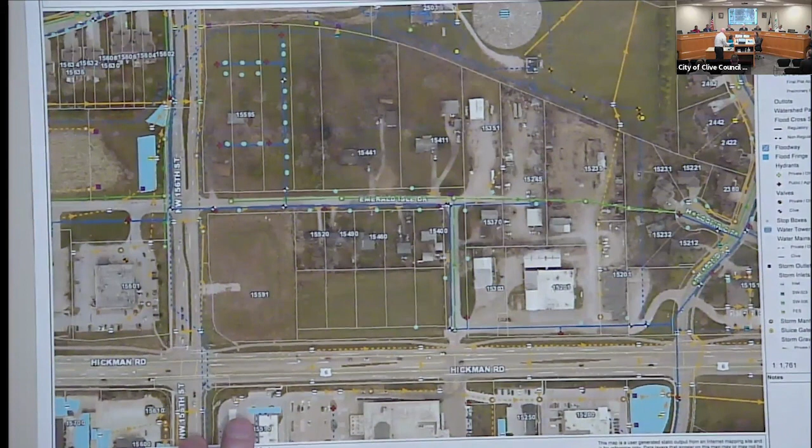Good evening. What you have before you tonight is a proposed preliminary plat for an approximately 4-acre parcel of property, generally at the intersection of 156 and Hickman. As you'll recall from a few months ago, there was a discussion around the property with respect to the rezoning of the property for commercial retail and service uses.

That decision was made by the council, so what we're dealing with tonight is the question of the subdivision of the property. This is the first step in subdividing property to allow for ultimately future development to occur on the property. The preliminary plat specifically gives the city the opportunity to evaluate the capacity of the infrastructure to support the subdivision of the property, so questions of what is the necessary roadway infrastructure, water, sanitary sewer, storm sewer, et cetera - either is it in place, or is it a function of the developer to install those improvements to provide the requisite capacity for the future development.

Following approval of a preliminary plat, applicants would then move on to the next step, which would be submittal of construction drawings, which would be the specific details associated with the public improvements. In this particular case, the applicant has started the process of designing the roadway improvements that are necessary for the property. That also has a component of stormwater as part of those right-of-way improvements.

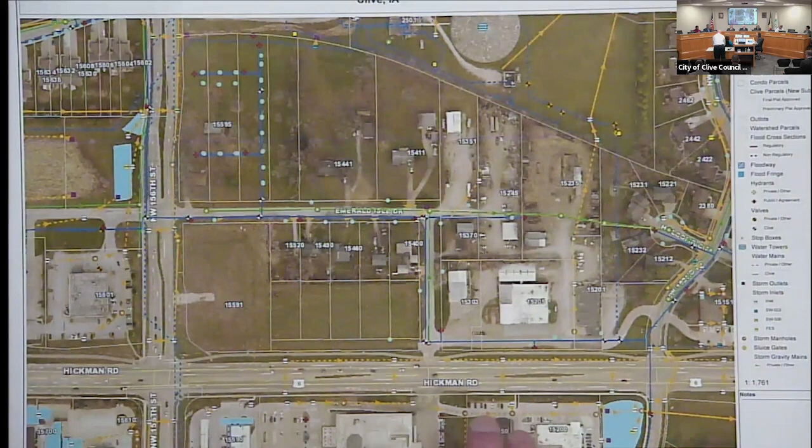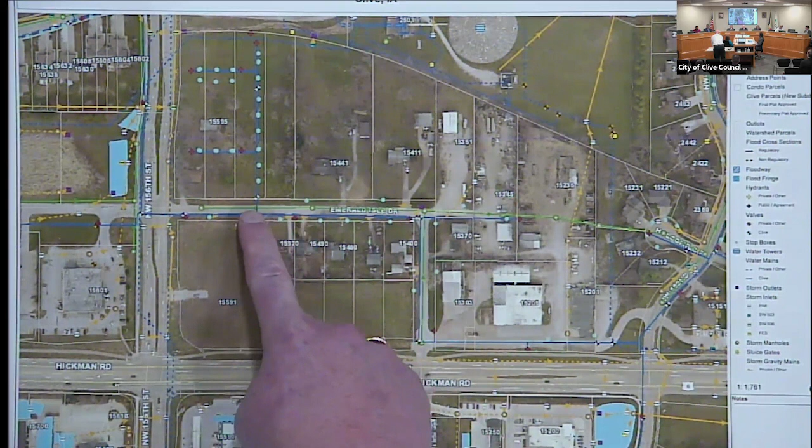So again, this parcel has been developed with a commercial bank. As part of their site plan, they made improvements to Emerald Isle adjacent to their property. As this property develops, the zoning change agreement established the responsibility for the property owner to make improvements to Emerald Isle Drive from Hickman to the point where the bank stopped.

Okay. So those plans are in the process of being reviewed. And that would be during the development, not the platting, right?

So they have the preliminary plat, which was identifying the conceptual subdivision of the property. We are in review of the construction drawings that will be approved by the council probably within the next few weeks. They will get underway with the demolition of the existing site features on the property, the existing houses. Once the construction drawings are approved, they'll be underway with the construction of the public improvements. And then along this path as well, they will submit for their particular interest, which would be lot 2, the one in the middle, for a site plan approval for the construction of a car wash. That will then subsequently get underway in terms of its construction as well, all coming to a point of conclusion in theory later this fall.

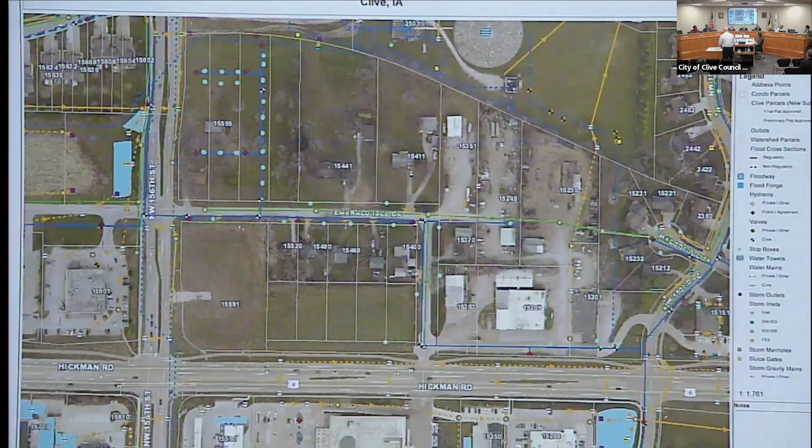Any other questions from the council? Otherwise, we'll invite others in the chamber. Would someone in the chamber like to address us on this matter?

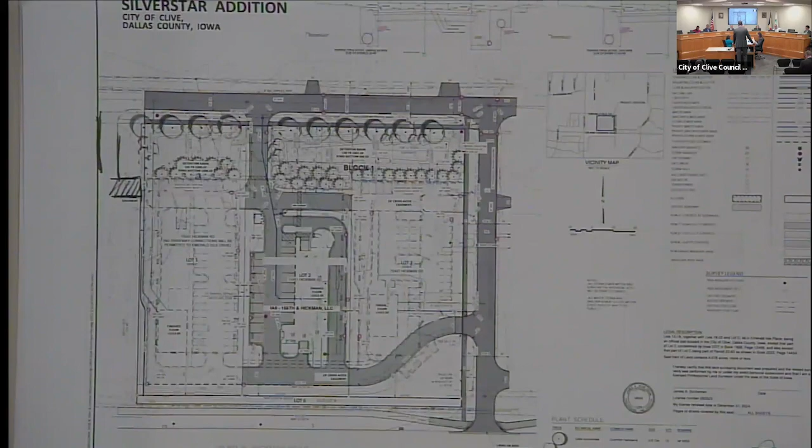As Doug laid out, we're here to seek approval on the preliminary plat. I have a couple representatives from Midwest Fidelity Partners here with me, along with one of our engineers. We've reviewed the staff report and recommendation. We would ask council to vote to approve our preliminary plat this evening, but we're happy to answer any questions you have for any of us. Any questions at this point?

Eric? Can you tell me about your plans for demolition of the current existing structures on there? I had a chance to drive by and it looks pretty rough. Can you give me a timeline and your planning on that sequence?

Sure. I'm going to defer to TJ Nelson on the timeline, but I believe the City of Clive Fire Department and Police Department have been using a few of those structures for training purposes, but I'll defer to TJ as to when that actual demolition will occur.

TJ Nelson with MFP. So we don't have a hard scheduled date for those yet, likely in May ahead of what we would hope to be a June construction start. Till then, we've been working with the fire department and PD so they can use those for training, and that's why they look so rough—they've been chainsawing into the roofs and whatnot.

Thanks. Is there anyone else in the chamber who would like to address us on this matter?

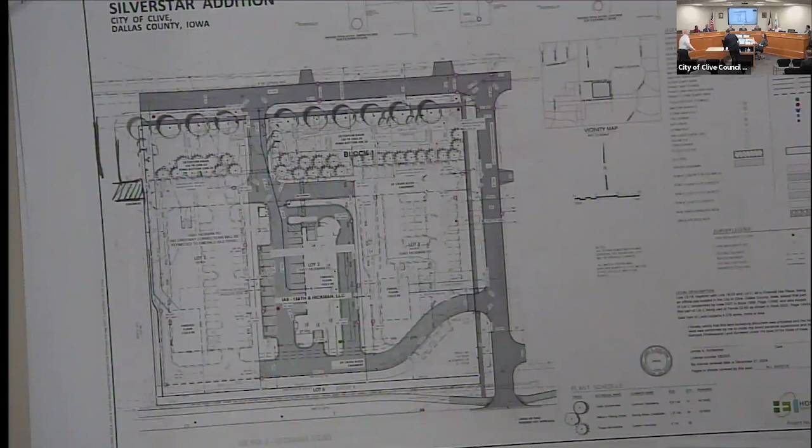Let me put a map up. I believe this is an accurate depiction—it's not going to be exact, but you'll get the gist. As you can see, this is that cross-access point there.

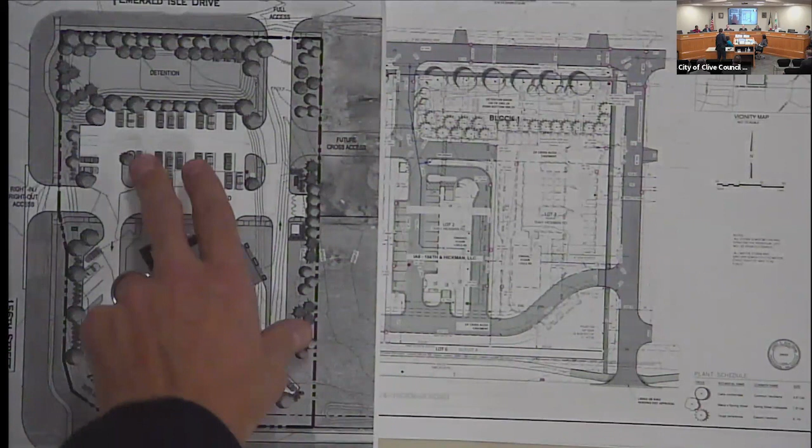Here's the platted parcel here, and here's the bank operation. Ultimately there's a right-in, right-out access off of 156. What the bank is after—we're worried. We've got employees and customers that are going to be entering or utilizing the bank. Here's the drive-through, which will come through here and then spit up there. Our primary concern is safety and operational issues there.

We're going to have presumably three high-traffic operations. The original proposal, I believe, was a two-lot setup—car wash and then maybe a small-scale office space. That's obviously shifted to this more narrow three-lot setup, which I think probably dictates car wash and fast food operations, which are high traffic operations.

I think ultimately the concerns are fairly obvious. If we have high traffic operations to the east, if there's any sort of internal traffic congestion or confusion, that gets funneled directly over to this bank's operation, which an office use and these high traffic fast food and car wash uses aren't wholly congruent there.

So inevitably, there's going to be, in our view, operational issues just with the internal traffic flow and safety issues, as the bulk of the traffic coming up on 156 more than likely will take that right-in to the bank's lot as compared to getting to Emerald Isle in an attempt to get to the other operators slash establishments to the east there. So that's our primary concern.

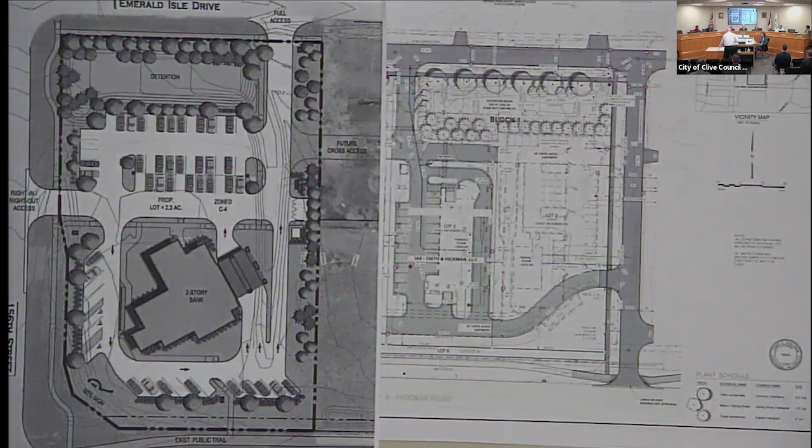In terms of the question of cross access, as you can see from the preliminary plat, the 3 lots, because of their relatively narrow frontage to the roadway, the city did not want to see 3 driveways out to Emerald Isle Drive — this lot having its own driveway, this one, and then another one out. It's very standard for us to try to instill a manner of access management for all of our developments, for the common good.

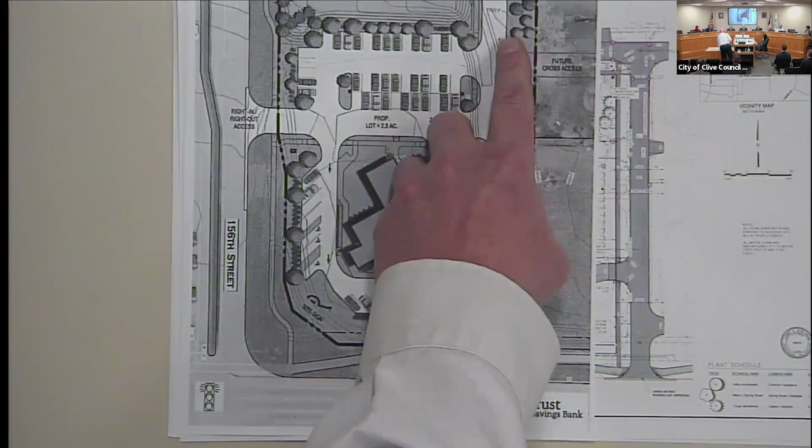So as we worked with the bank as the first piece in this overall development, we did require, as part of the site plan approval process, the reservation of an ingress egress easement. The pavement itself did not get installed, but an easement was established to allow for the accommodation in the future if there was a need.

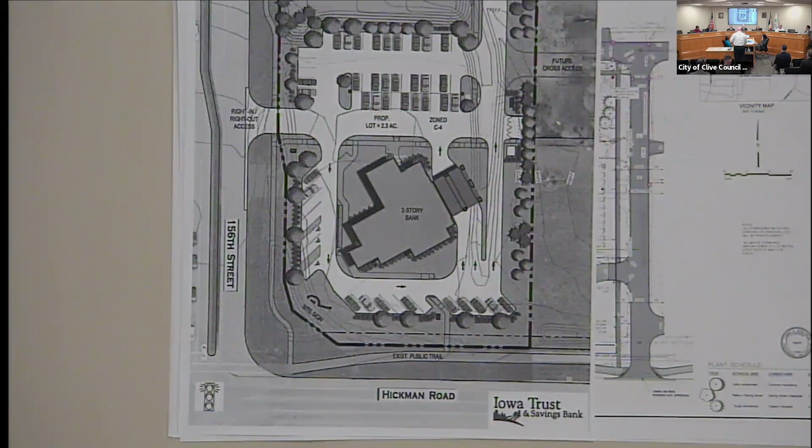So as we move into this particular plat, because we were looking at access management functions, this is a possible access point, and it's something that would be evaluated when the site plan for lot 1 came in. If it's a type of use that would have an advantage to have access, great — the accommodations are there to support it. But it doesn't at this moment require that driveway access be created. It's something that will be evaluated when that site plan comes in.

But at this particular moment, to undo the access easement opportunity is not something staff would support. The flexibility needs to be there. It may be used in the future, but it's also possible that the particular use won't have a need for it. Is that easement sole discretion of the city?

The easement was established, granted as a public ingress egress easement, so it is of record and would be available to be used in the event that the site plan on the adjacent property has a need for it. But the city would have to allow that to happen in the future.

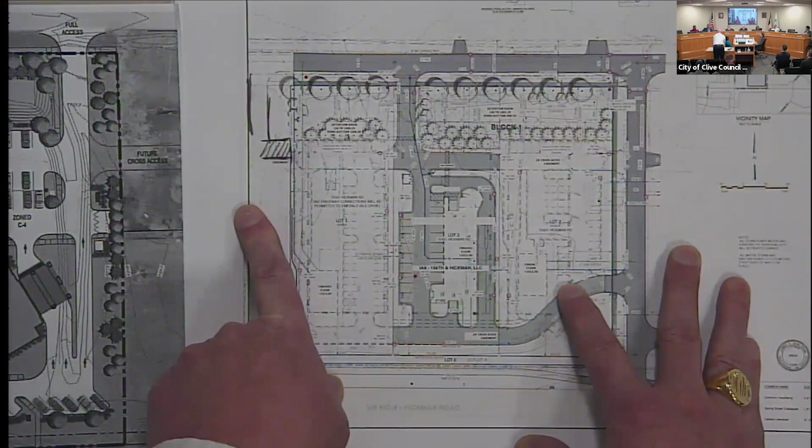Yeah, I would say again, if this particular lot's layout needed more access, and we felt like the access would have an adverse impact on the bank, sure, we might be talking about a driveway in this location generally, or even expanding the proposed driveway there. This particular driveway is 24 feet wide, so it's more than sufficient to accommodate both-way traffic. So maybe it's just routing the circulation that way.

It really comes down to what type of use and whether it requires a lot of that. If it's just an in to a parking lot, quick-serve kind of situation, that's one thing. If it's a high-volume Chick-fil-A type business, then we'll have a different conversation. The point is we have the flexibility to adjust based off of that type of use. This preliminary plat really has no bearing on that — it's a very site-plan specific question.

Other questions? Anything else, Doug? That's all I have unless you have others. Unless there's anything from anyone else in the chamber, we're looking for approval of a preliminary plat.

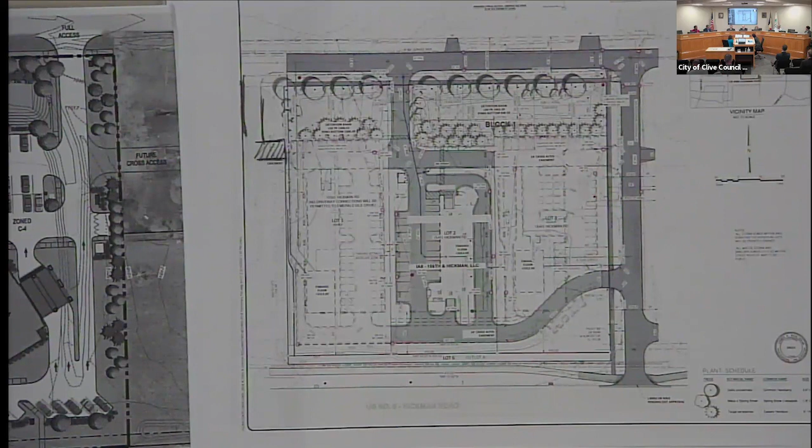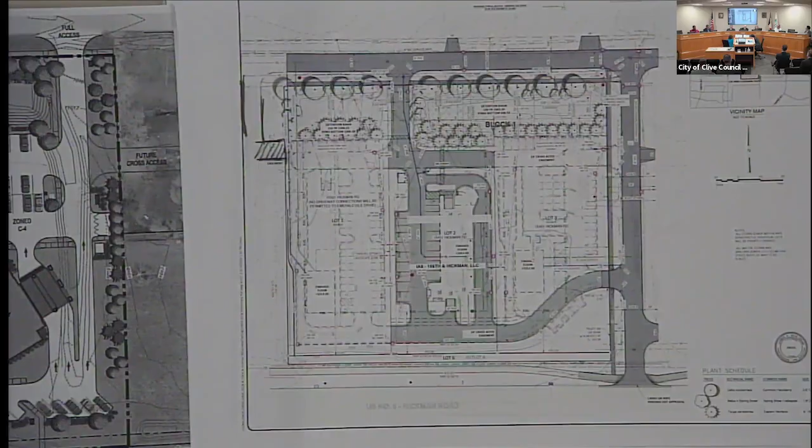I'll move the resolution approving the preliminary plat. Second. Motion seconded to approve the preliminary plat. Further discussion? Seeing none, council please vote. Mayor, I'll be abstaining. Will the clerk please post that vote? That passes with 4 affirmative and 1 abstention. Thank you all, more to come.

Next, we have a site plan for Berkshire Commons Office Park Plat 1.

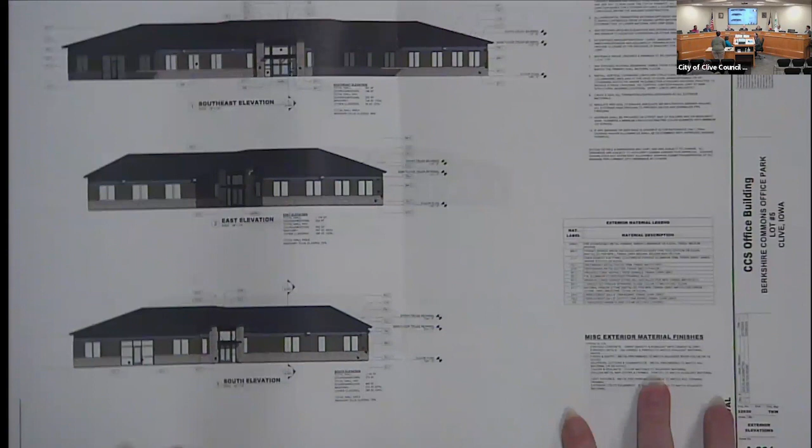We have a request for site plan approval for a new commercial office building for Covenant Construction, located at 2640 Berkshire Parkway, Lot 5 of Berkshire Commons Office Park Plat 1. The applicant is Covenant Group LLC. The subject property is approximately 1.2 acres in size, and the proposed use is consistent with the zoning, with aesthetics harmonious with the rest of the larger office park development in the area. Staff has not received commentary for or against the request, and notices were mailed March 25th, 2024 to adjacent property owners within 310 feet.

The proposed office building is approximately 7,464 square feet in size, 1-story tall, and comprised primarily of masonry cladding, brick veneer, and glass. The east elevation facing Berkshire Parkway contains an enhanced entrance vestibule to break up the roof line, and a residential pitched roof is proposed as required within the original development agreement. I'll switch off here for the actual site plans.

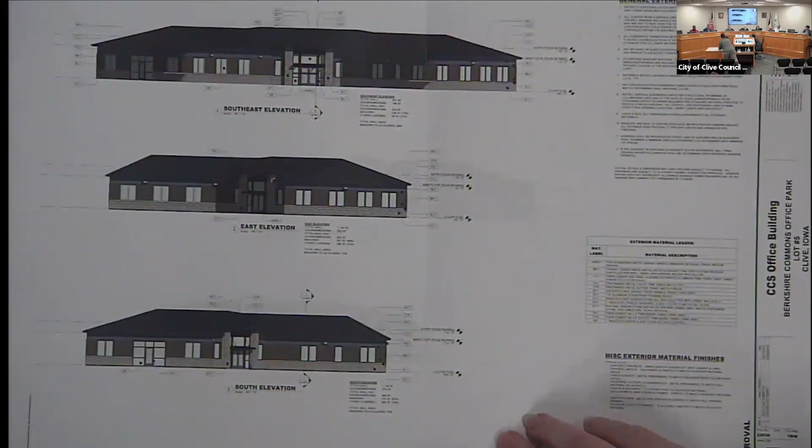Access is provided by shared access to the south, and parking is in excess of the minimum requirements due to the nature of the business, general contracting. Additional open space and landscaping has been provided to compensate for the additional stalls as required by the zoning ordinance. Accessible stalls are provided, and a sidewalk provides access to the building entries from the public walks. Additionally, the sidewalk connects to the extension of the public walk along Berkshire Parkway to accommodate pedestrian traffic.

Sometimes I wish that I would read ahead of myself.

Staff met with the applicant on site to discuss protected landscaping. What has been identified to be removed is mostly volunteer trees and scrub brush along the unnamed creek. While the volunteer trees and scrub brush landscaping will be removed, the applicant has provided the required landscaping to reestablish the natural essence of the area. No replacement penalties are necessary for the removal of the identified landscaping.

Appropriate public utilities exist to service the site, and stormwater will be managed by a bioretention basin that ultimately outlets to the north of the site into the creek.

At this time, staff would recommend approval of Berkshire Commons Office Park Lot 5, pending the resolution of any outstanding items on the comment letter dated, I believe it's March 29th was the most recent, and receipt and review of any legal documents. I'm happy to answer any questions.

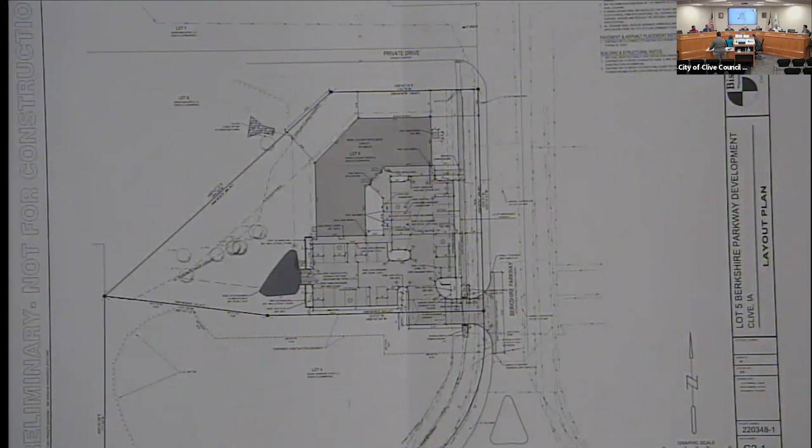I'll move approval of the site plan. Second. Motion is seconded to approve the site plan. Further discussion? Seeing none, will the council please vote? Yes. And will the clerk please post that vote? That passes by a vote of 5-0.

Thank you. Next, we have a professional services agreement with OPN.

Matt: Thank you, Your Honor. Over the last couple of months, the staff has been working with DCI Group, and Kelsey Richardson is here from DCI as well, going through an RFP process for the security and enhancement remodel of this facility, City Hall Library Building, mainly the office spaces, council chambers area, not what I would call the front of house of the library, because we've done a lot of improvements to that here in the recent 5-6 years. But focusing on those staff areas, the council chambers, and some of the security concerns and flow of the overall building. And we sent out an RFP.

We received 5 responses to that RFP. Both DCI, myself, and then Angie Fonku from Sidekick as a consultant under the DCI contract evaluated those proposals. We scored them and then identified OPN and ISG as the top 2 from those 5 proposals. We moved on to an interview phase and received presentations from both teams. Following those presentations, we would recommend before you tonight a contract with OPN.

OPN has a lot of experience doing city hall facilities. They've been involved in a number of them in the metro area, whether it's Johnston City Hall, which they designed as a new construction project, portions of Ankeny's remodels and their council chambers and library, even the Carroll City Hall, which was remodeled and designed by OPN, and a number of other public facilities. They also specialize in library and library space areas as well.

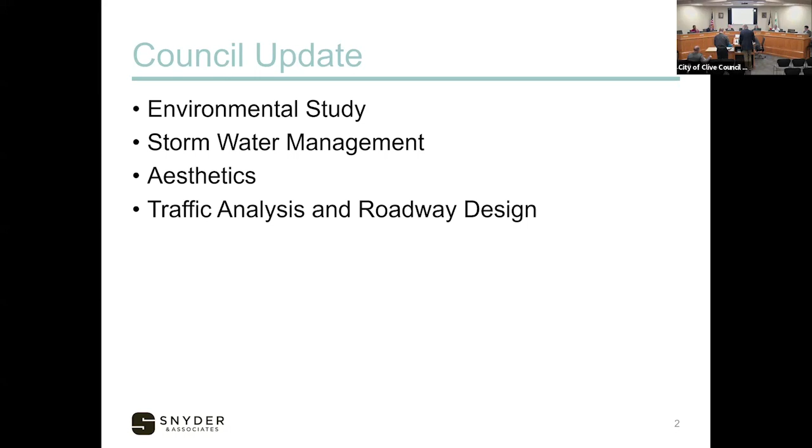Kind of what we've looked at so far to incorporate stormwater management into the project. Just briefly what we'll do moving forward for aesthetics, and then quite a bit of detail here on the traffic analysis.

We've broken the project into really 4 phases, but we look at it in terms of 2 phases initially. The phase 1 project is from Horizon Drive up through south of Douglas Parkway, probably about 300 feet south of Douglas Parkway. That is the first project that'll be constructed. We're looking at starting that construction in 2025, it may go into 2026. As we get more into the detailed design, we'll know how long to allot for that construction.

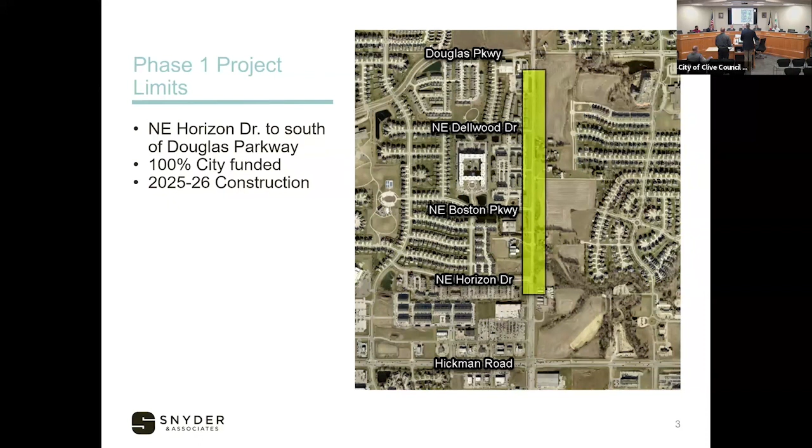We're anticipating that's 100% city funded. Part of the reason we don't need to do some of the in-depth environmental studies that we will have to do in the subsequent phases is because of that city funding.

So phase 2 through 4, phase 2 is kind of Douglas Parkway, phase 3 is from Douglas up to Berkshire, and Berkshire to Meredith is phase 4. But we're studying all of that at once. Currently through the city of Waukee, the intersection of Douglas and Alice's has $1.35 million in federal funding. The city's recently asked for an additional $1 million in STBG funding for the Douglas to Berkshire portion, and plans to probably keep asking for additional federal funds for subsequent phases in the future.

So with that, it pulls in the need to do NEPA investigations. We actually work with the Iowa DOT to classify what level of documentation we'll need to do as part of that project, based on some anticipated impacts of the project.

We've recently received word from them that they're classifying this as what's called a PEL NEPA study. The PEL part of it is planning and environmental linkages, so basically that's the alternatives analysis that we do, where we study and investigate the environmental impacts. NEPA is obviously the National Environmental Policy Act, so that's what says when you're spending federal dollars on a federal action, this is the process and level of documentation you have to follow.

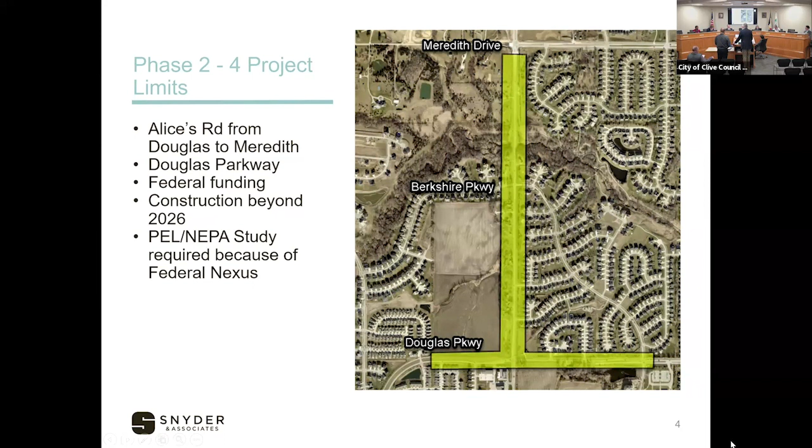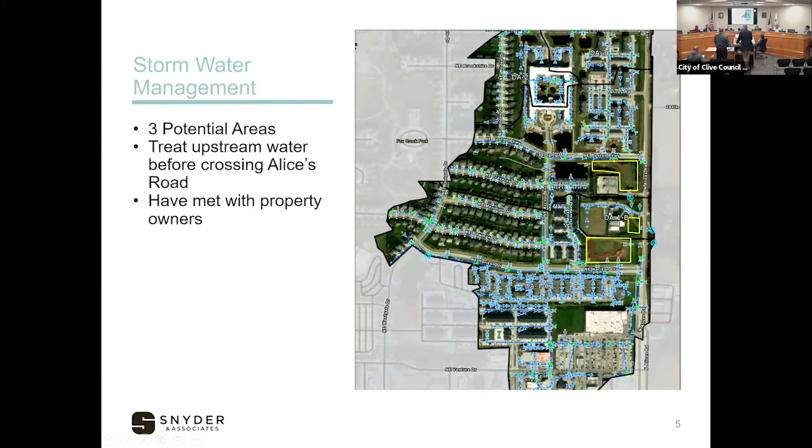Looking at putting stormwater management into the project and how we're going to manage stormwater. This is the phase 1 area, so what we've been tasked with is these are the drainage areas that flow towards Alice's Road in that phase 1 area. All of these areas, the corridor has been developed, the upstream drainage areas have been developed, and they would have provided detention for those major storm events. But because of the age of the developments, they don't necessarily provide any water quality improvements for the lower events. So what we're looking at as part of this is treating that upstream stormwater before it gets to Alice's Road and eventually flows into Clive and into the creek.

So these are 3 different areas that we're looking at. They're fairly open areas. There's one at the bottom of the page that is a regional detention basin controlled by an LLC owned by Nat Properties, that takes the area off of the Hy-Vee area. There's the OneNeck Data Center, where there's basically a draw that runs in the front yard of the data center. And then there's the MidAmerican Energy Substation, which has a fairly large area there.

So we've spoken with Mid-Am, the operator of the OneNeck Data Center, and Nat Properties. They've all been open to allowing us to further investigate those areas to see if we can do some kind of improvements to treat the stormwater before it gets into the storm sewer system and continues to flow off to the east.

So are those going to be like ponds or?

So likely we're going through the different options, and actually they'll probably look a lot like they look today. So what we would probably do is look at amending the soils to allow infiltration of the first inch of stormwater that falls on there.

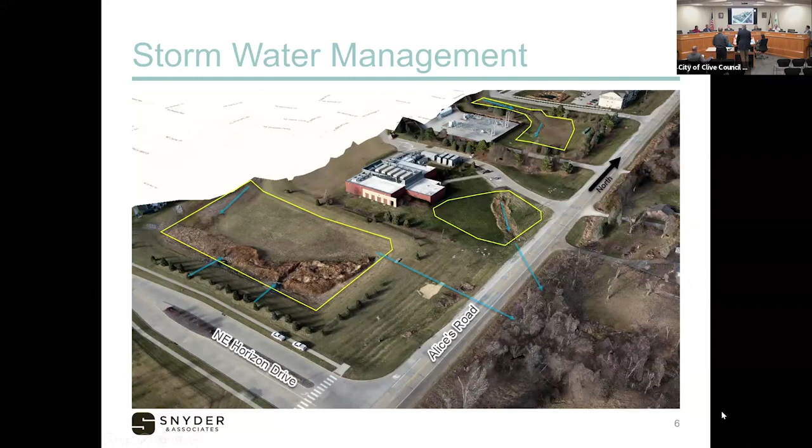With that, I'm going to turn it over to Todd, and he can go into the traffic analysis that we've done to date.

All right, thanks Gabe. So basically, just wanted to reiterate, the project intersections are along Alice's Road: Northeast Horizon Drive, Northeast Boston Parkway, Northeast Dellwood Drive, Douglas Parkway, Berkshire Parkway, and also the Douglas and Berkshire Parkway intersections. We took traffic counts last year in November to see what the traffic patterns were. Basically, Alice's Road has between 13,000 vehicles south of Horizon up to around 8,000 vehicles up near Meredith Drive, which is kind of what we were expecting for traffic along there.

Then we reached out to the Des Moines area MPO to see what their forecasts were for these corridors. We found that they're projecting out to 2050 increases in traffic on Alice's Road, up to like 16 to 18,000 in those same areas. So not a huge increase, but still a significant increase for the corridor. And then Douglas Parkway was around 8 to 10,000, so again some increases, but not too much.

We also looked at the crashes occurring along the corridor, and fortunately there aren't a whole lot of crashes. In the last 5 years, we noticed there were only 2 minor injuries at all the project intersections, which is great - it hurts for future safety funds for potential project funding, but it's great that no injuries are occurring. However, we also looked at the DOT data.

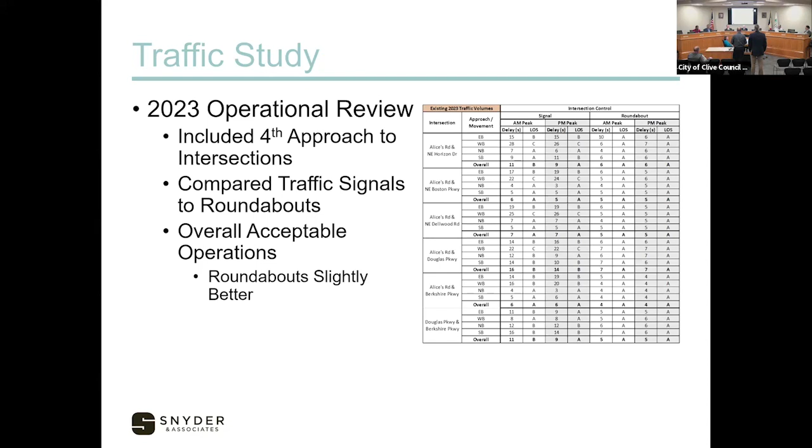Now moving on to 2050. We noted the traffic growth to 2050 from existing conditions, so we put on a 2 to 3% growth across all the intersections. That's conservative, trying to shoot high for the traffic volume so that we're not underrepresenting where we need future improvements. Going through that, we identified one.

You see that one highlighted cell - that's Northeast Horizon and Alice's Road, the eastbound west side. We identified the roundabout as poor operation there, but one thing in our benefit right now is Alice's Road south of Northeast Horizon is a 6-lane facility, and we're constructing a 4-lane Alice's Road corridor. So we have the potential to build what's called a bypass lane, so that the eastbound right turn movements can connect directly to that sixth lane, the outside lane, without impacting the actual operations of the roundabout.

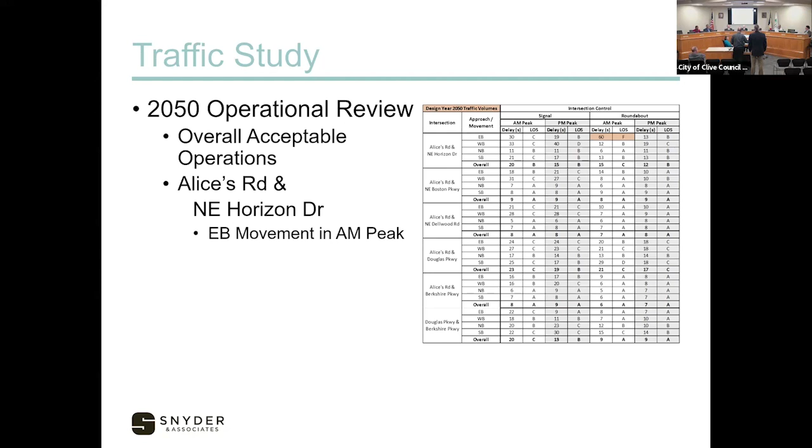So that's an option we can use to alleviate that one poor movement out there, 25-plus years from now if we need to. So operationally, everything is basically okay.

Now, we also continued to move on and we analyzed life cycle costs. From that, we compared the overall construction costs based on very preliminary layouts, the typical maintenance for traffic signals versus roundabouts, the delay incurred by drivers, the emissions, and safety aspects, because roundabouts tend to be about 75% safer, at least for injuries, than traffic signals. So we factored those in.

We used some national standards for time value of money, or time value of somebody's time. We applied those and came up with this table. Basically, the roundabouts cost over the life cycle roughly $2 to $10 million less than what a traffic signal would be across these intersections from our analysis.

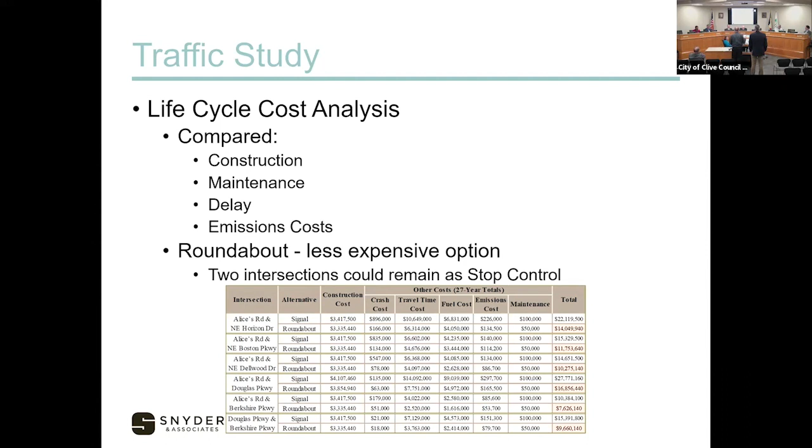So what are our recommendations? We're recommending at this point roundabouts at all the project intersections. And if there are some other full public intersections, those could be roundabouts as well. But at Alice's and Douglas, since we're proposing 4 lanes in all directions, it'd have to be a 2-lane full roundabout. The other ones we call a hybrid roundabout, where 2 lanes would be on Alice's Road and 1 lane from the side street.

You may ask why we selected roundabouts. One, life cycle cost—roundabouts were less. Two, safety. It's hard to argue the safety factor because they minimize the chance of severe crashes, the right angle crashes you can get at traffic signals and other intersections.

Three, we're really changing at Horizon—from a commercial corridor to a residential corridor. So we're going from lots of people trying to get to businesses to now people trying to get home, where they might be walking along the streets. Roundabouts tend to traffic calm the corridor, slowing down speeds and making things a little safer. So with all that, that's how we came up with the recommendation to recommend roundabouts at all these intersections.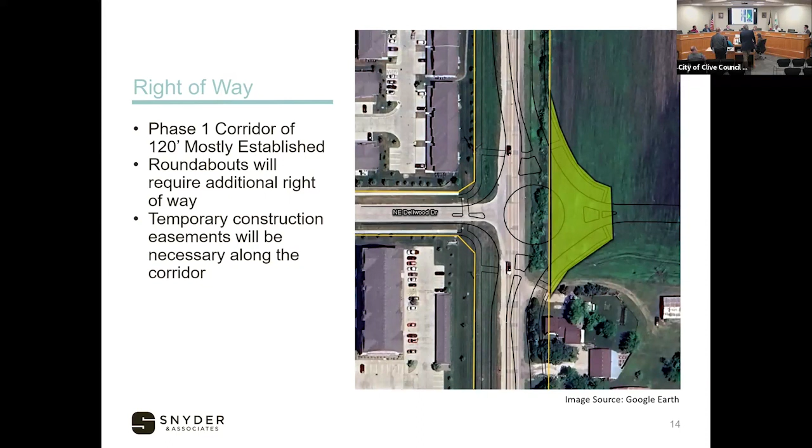So the life cycle cost makes sense, as well as what we'll call the land use zone—what makes sense more for a residential use makes sense as well. It just seems to come all in line with this entire corridor. Of course we've got phase one a little bit more honed in, but then Douglas, and as we get to the Douglas and Berkshire intersection, there'll be a little bit more detailed conversation that we'll have, especially with the surrounding neighborhood, because that's adjacent to Shuler Elementary.

And to Gabe's point, it might be hard for folks to understand, but it's actually safer for pedestrians than a traffic signal. That's likely going to be an intersection where we're going to have kids crossing.

Although that neighborhood to the north doesn't go to Shuler today, we know from what we've heard from the Waukee School District that at some point that Angel Park neighborhood is going to be going to Shuler. So there will be kids crossing, and of course there'll probably be a crossing guard associated with that, just like there would be if there was a traffic signal. But that one we know will be a little more sensitive, so we had to be careful about how we talk through that with the neighborhood.

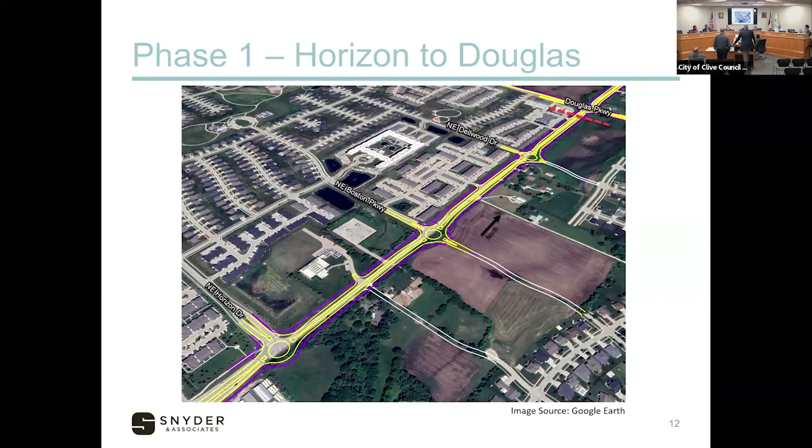But all the other spots in this corridor, those roundabouts make sense. We still need to figure out a little bit Prairie and Airline Drive, which are in between Douglas and Berkshire, because we still have future development of commercial and multifamily to the west. He's showing it right there with Prairie Drive, how it would connect over from Berkshire and the Shadow Creek neighborhood. Those are two we still need to do a little more work on, and of course that has to be part of the PUD process as well. We've got a little more time, but we've got future development in those 80 acres to the west, and some of that will be neighborhood commercial but also multifamily. So we have to think through what that Airline and Prairie Drive connection needs to look like. But we have a pretty good understanding of what those other ones need to be, and think it makes a whole lot of sense for this community in the long term, to have that traffic calming along that whole corridor.

I have a question, Your Honor. Yes, Susan.

This is a major connector and will be going far to the north. We already know it is, to the south. So I just want to make sure we're not just thinking about this relatively small residential piece that we have in Clive, and are really thinking about how it functions with the whole system. I'm a little concerned to hear about doing the traffic calming here when there might not be any other place along here. It's very potentially going to have commercial components going on to the north as this builds out. So I'd just like to know that we're not investing too much in terms of extra resources to do this more expensive type of build out that's an anomaly for the corridor as a whole.

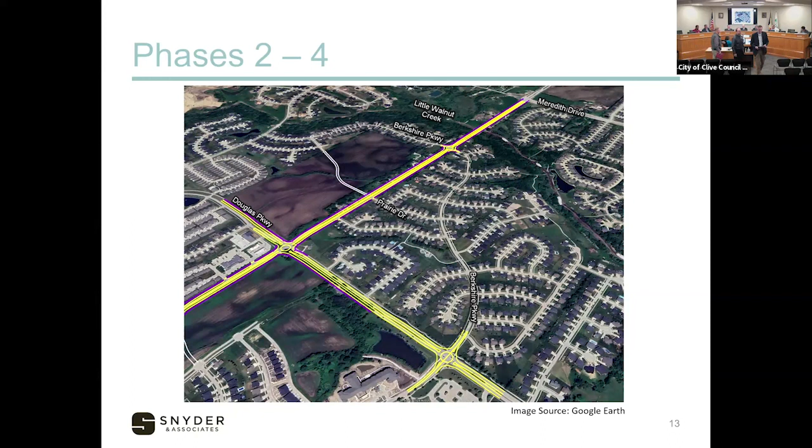As we've done the last few years, we've tried to take a moment to reflect on what has occurred over the last 12 months as it relates to the city's flood preparedness. We've been very fortunate for the last few years to not be flooding, but at some point in the future we're certainly going to have to experience and deal with the ramifications of flooding along Walnut Creek. I'll run through a few of the primary components that have occurred over the last 12 months, and give some insight on new information we've recently received regarding how we're moving forward in the buyout area specifically.

First, I wanted to reflect on our Be Flood Ready brochure that we send out to all property owners within the City of Clive's floodplain. This particular iteration went out to about 500 people. The primary focus this year was discussing flood insurance, reminding folks that after a few years without a flood, people can get lackadaisical about their risks and let flood insurance lapse since it hasn't flooded. We want to put a focus on that over the next few months, making sure people are assessing their risk appropriately and obtaining the appropriate risk management tools for their circumstances.

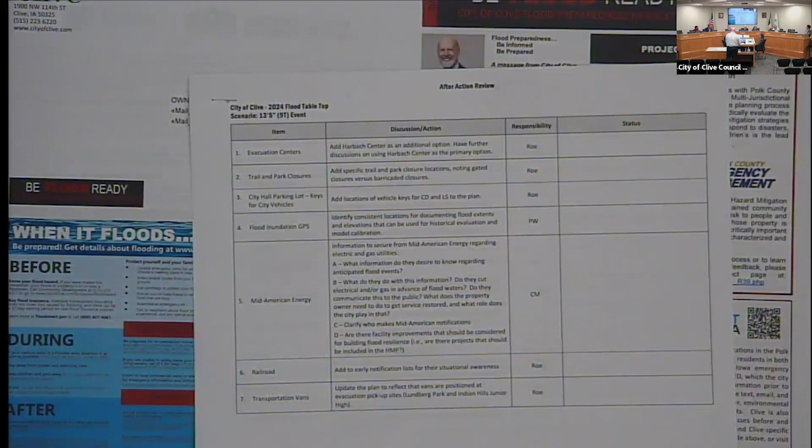There's some to-dos in here that we'll be working on, and some will come back to you in the future in terms of approvals for certain actions or purchases of different components to improve the plan itself. One thing I wanted to note is we haven't used the aqua dams in a while, so Jeff and the Public Works crew noted it might be good for us to roll one out and see how they're holding up in terms of the material. We're going to coordinate that with the businesses down there, maybe this spring or early summer, at a convenient time to roll one out and fill it up and make sure the rubber membrane is doing well, since, knock on wood, they haven't been rolled out since 2018. So we feel we need to do that and get an understanding of the lifespan of those, since they're relatively new. That's something you'll see, and if you're interested to see what it looks like when they fill those up and throw a hydrant open, it's pretty fascinating. We'll have more information for you on that later this spring.

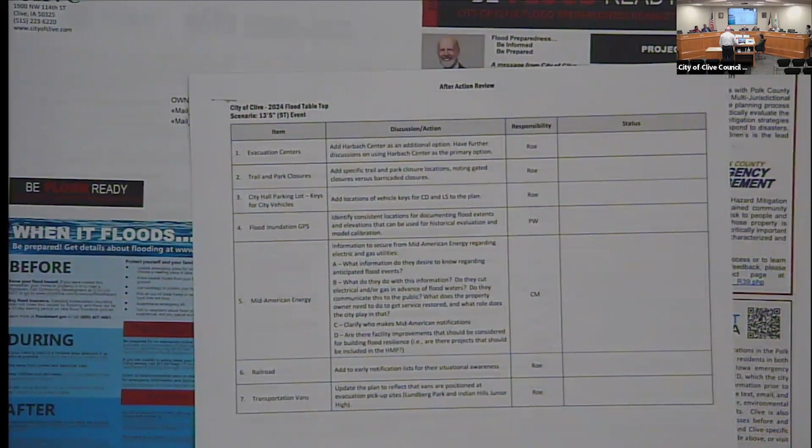One of the other activities we've been working through in the last few months, and will continue to work through and come back to you on, is the update to the city's hazard mitigation plan. We do this in concert with Polk County and all the other communities within the county to develop this regional Polk County hazard mitigation plan. The primary benefit for the plan is really twofold. One, it gives communities and stakeholders an opportunity to think about regional risks and what resources are available within the region to address those risks. As we all know, the flood doesn't care about a corporate boundary, the tornado doesn't care about a corporate boundary, so we need to make sure we're prepared together as a region. That's what the planning process allows for.

Secondarily, with respect to the city of Clive specifically, the hazard mitigation plan itself becomes the foundation for what we use for grant applications. So the projects we go after, like the ones related to the flood buyout area, originate in this plan. They must be in the plan to then be able to ask for funding and other federal types of assistance. So we are going through the process of updating it. I gave you in your packet the first cut from a staff perspective of all the types of hazard mitigation projects we've been noodling on. The plan horizon is really 5 years, the list of to-dos is probably 25 years, so there'll need to be some prioritization around it.

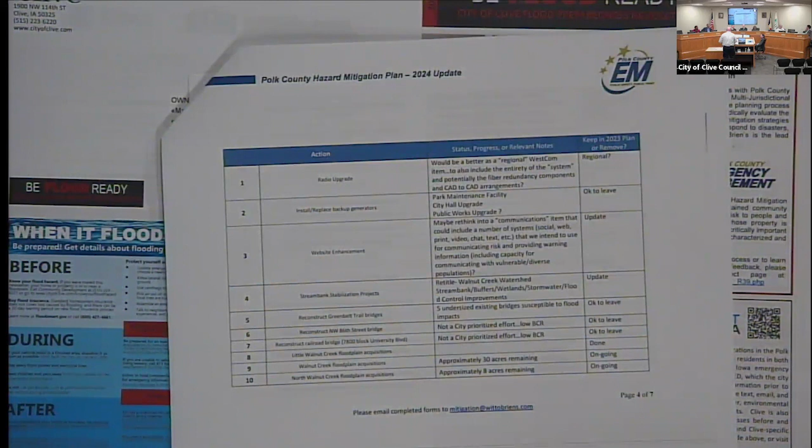We still are having the conversations, meeting the property owners where they're at. The way I try to explain this is it's all about being patient, but being persistent and being prepared. This is not a 1-year thing, not a 3-year thing, not a 5-year thing. It's about when property owners are ready to make a move - we want to be there ready to support them in their transition into the next space. We've taken that approach and it's worked very well. We're building those relationships with property owners, and I know there's 2 or 3 of them that within the next year or next 3 years are ready to go. We're going to make sure we're geared up and prepared to take care of them when they're ready. I'd suspect we'll get another 1 or 2, maybe 3 houses purchased this next year.

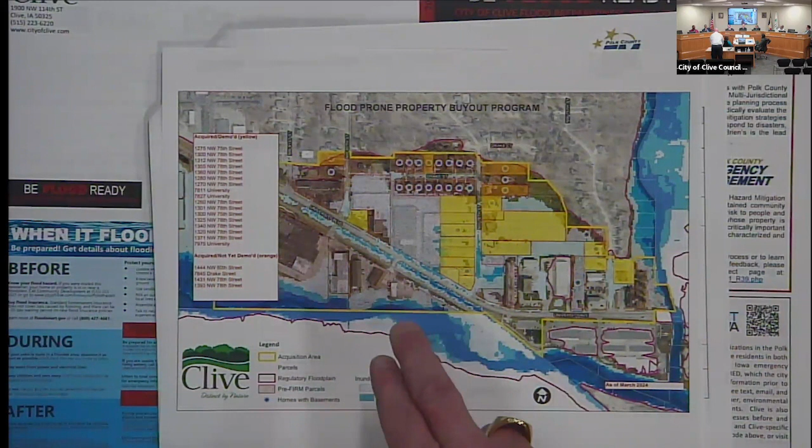I just remember that vision plan, and it has redevelopment on the outer areas, not gentle density, it has real density. You kind of pick a line in the sand of where we could redevelop. So I'm just wondering, do we share that with the folks? Yeah, talking about it—so as you'll recall, the 86th Street District 1 neighborhood plan, that's the vision that you're talking about.

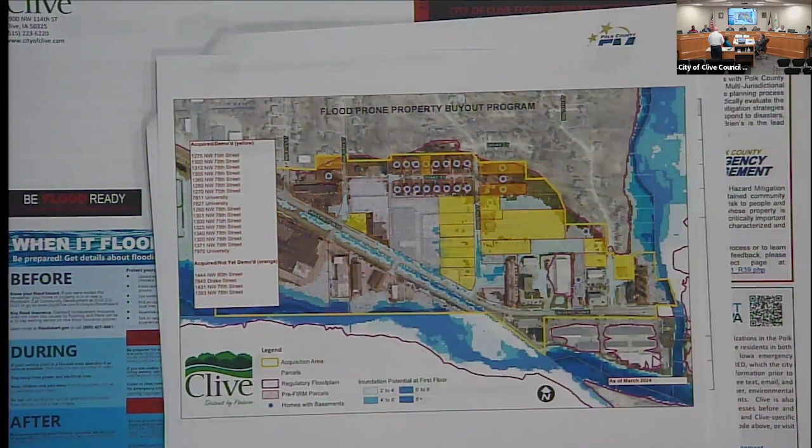And basically the choice made in that planning process was the floodplain is most important. The ability to convey floodwaters is what needs to happen in this space. Secondarily, what else can we do at the ground? There'll certainly be opportunities for park and recreation amenities integrated with stormwater management. But just thinking through it, if we have to dig a big hole here, because we want stormwater management or flood mitigation benefits, we've got to do something with that dirt.

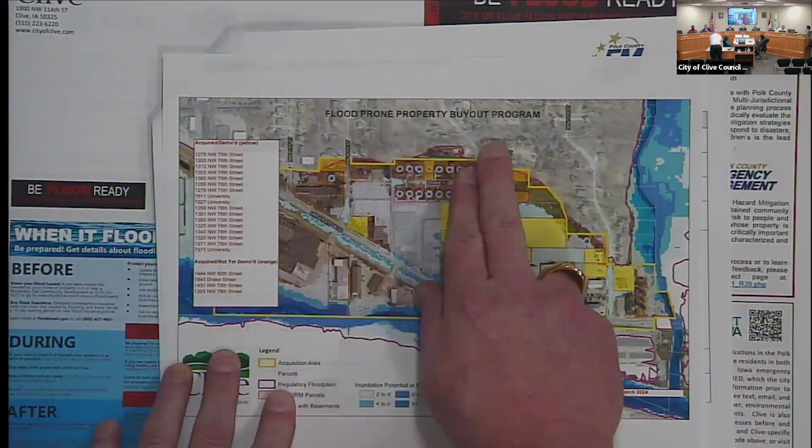And hauling it a long ways is not very cost effective. So is there the opportunity on the higher side of the floodplain to leverage the dirt in a way that sets the grades high enough that a new development, a new house, and it very well could be a house, it could be a townhome, it could be a small apartment building. Again, I think we're talking about something that is in character with the neighborhood. Is that an opportunity when you connect all those dots? That's the part that we have a vision of. We don't know if it technically works. The grant that we've received the money from for now will answer that question over the next 12 months.

With respect to the transparency, the District 1 plan, that vision document, that one image that I know you've seen that just shows kind of the whole green area here and shows the redevelopment on the edge. That's a very large image on my office wall next to the table that I have all of the conversations with these property owners with. So there's a lot of finger pointing and a lot of markers, things of that nature, as we have conversations with folks. So certainly there should be very little ambiguity in terms of what the city's hopes are for this area in 15 to 20 years.

I'm curious, have we gotten any comments from those people that you've had discussions with about this? Yeah, I would say that mostly they don't care because they're simply selling to the city at a fair market value. And they're transitioning into the next stop.

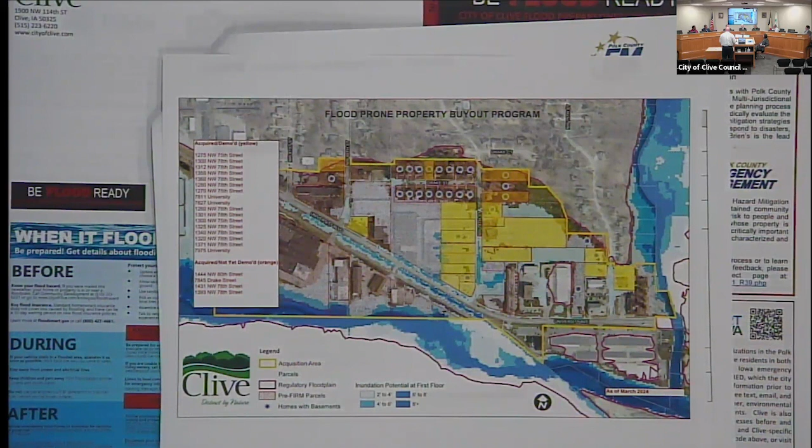Anything else for Doug? Thanks, Doug.

I want to say congratulations - 15 million, huge win, it was a good week for Team Clive. Looking forward to hearing more about that, Doug. I want to give Doug a lot of credit - he's put a lot of time and effort into figuring out the most efficient way to weed through the federal government bureaucracy, and there are very few people in this state who have it figured out as well as he does. That's a huge benefit to Clive taxpayers to see these visions move forward, leveraging in this case 27-to-1 city dollars to federal dollars - that's some real money right there. That's a testament to his and his team's hard work on this, the CRS program, and all the departments, because they all have to chip in to make the CRS discounts happen and our flood operations planning work. It takes a team, but he's definitely put a lot of effort into this, and we've focused a lot of his effort in that area. Good job.